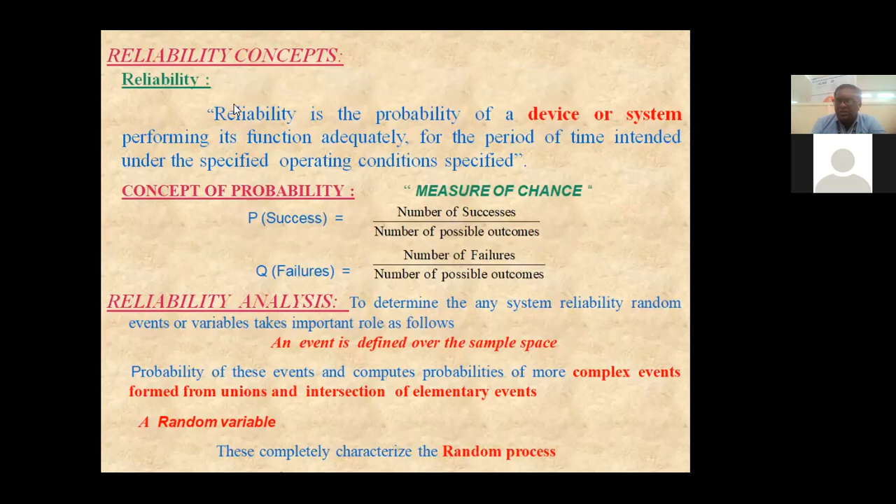So what we know is that majorly reliability is the probability of a device or a system performing its function adequately under stated operating conditions in a specified period.

So if you see that device which I am considering together as an electric vehicle, it's a device which contains so many systems like inverter system, transmission system, and then charging system, battery, like that. Many systems are there. So whether they are functioning adequately or not, when they are functioning adequately, what are the challenges and issues which occur during the operating condition, how it is to be overcome.

So it can be expressed in a qualitative and quantitative environment. So the major single word statement is measure of a chance.

How we are going to make my electric vehicle a success, how we are going to make my electric vehicle a failure, based on the number of successes over number of possible outcomes, number of failures over number of possible outcomes. How to analyze this?

Since my electric vehicle is random in nature, it has got many processes and many procedures. This is a complex system which has to be performed sometimes as unions and sometimes as intersections, as an elementary process or an elementary event, which has been characterized as a random process, as I told you earlier.

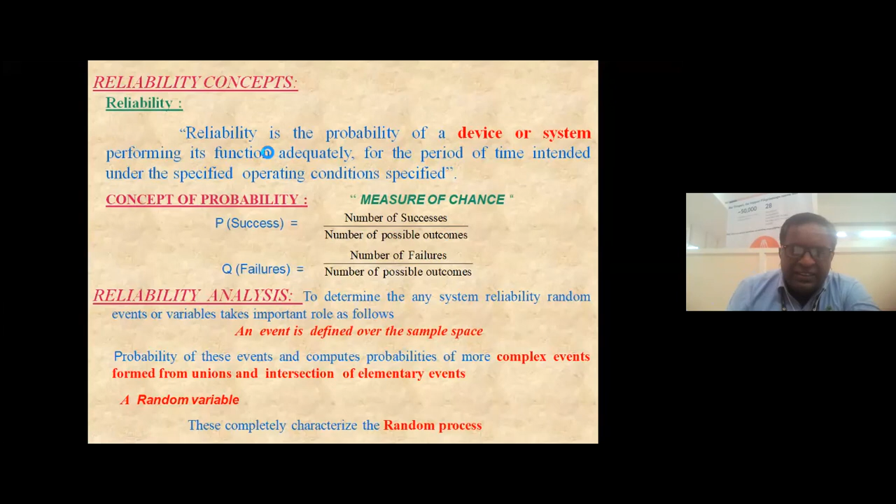So why do we need to go for reliability? To increase the automation process, to assess highly complex systems, and to estimate the high cost of failures and repairs of the electric vehicles or hybrid electric vehicles.

And what are their profitable conditions, and what are their operating abilities that we can able to see, what is the demand for the quality of the product, how we can increase the quality of the product, and what are the additional features that we can add into the next generation of electric vehicles.

And at the same time, how to reduce overall maintenance cost, and how to increase the travel distances so that the overall cost of the society or overall cost of the transportation system may reduce, and to make optimization of resources where it is needed and possible.

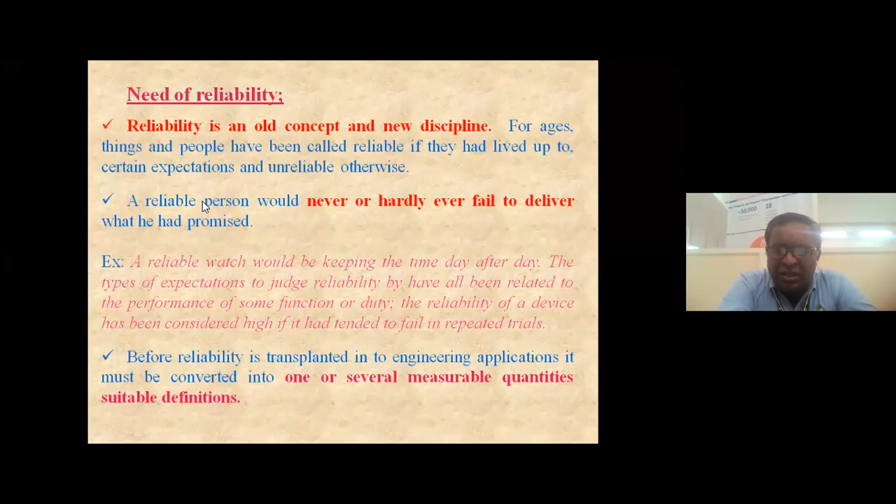So when we consider all these things, we need to identify the intended failures, and repeated trials have to be considered. This has to be in measurable quantities in engineering applications.

So when I'm going to assess, what are the things which I can able to assess? One is past assessment, another one is future assessment.

What is the past assessment which we can see, especially in future transportation systems? What are the weaknesses which we have identified, especially with the help of fossil fuels, where we can see that the cost of transportation becomes very large, especially on average in modern days, 10 to 12 rupees per kilometer has been chargeable.

It becomes very difficult and challenging for a common man to afford, and what are the difficulties of that automobile fuel vehicle? Similarly, what are the weaknesses present in the existing transportation system, and chronological trends in the reliability performances can be observed.

Being able to identify and estimate the existing reliability indices can serve as guidance for future assessments. Past predictions can be compared with the actual predictions that occur at present, and these quantities can change during the time of design as well as at the time of operating conditions. What changes need to be noticed?

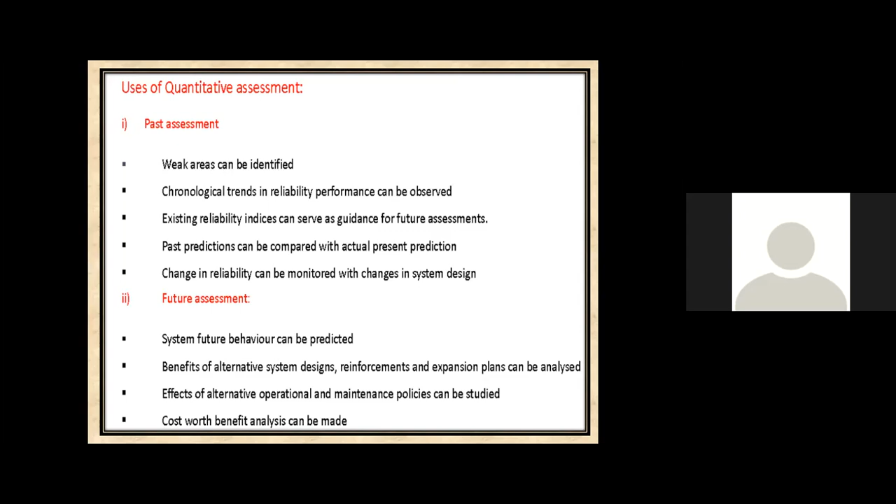This data may make the past assessment useful for future benefit. The future benefit you can see is system future behavior, how it can be predicted, and what will be the future transportation, what are the benefits, and what are the alternative designs and reinforcements, expansion plans, which can be easily analyzed in a complex system in a qualitative and quantitative manner, so that it becomes more effective.

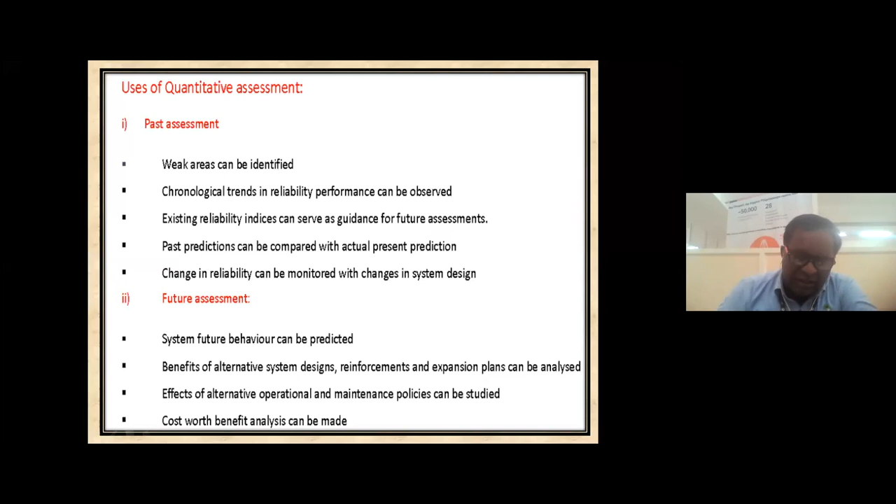This also makes it most cost beneficial and feasible for society. So here, one more thing we have to see is that planning of reliability has to be done at two levels: short-term planning and long-term planning.

When considering long-term planning, incorporating redundancies and various methods which influence the improvement of reliability, how do I need to assess for long-term system planning?

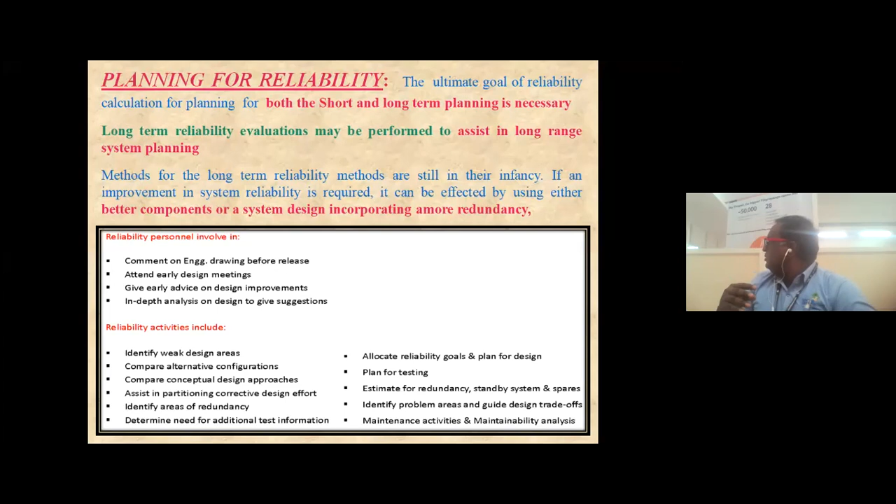Just a second. Sorry for the inconvenience, it's a college. No, students will come and go.

So what are the parameters which need to be considered and involved? Personally commenting on engineering manufacturing drawbacks in designs, being able to attend to new designs, early meetings, early advice, design improvements, probably in-depth analysis with proper suggestions, probably taking the feedback of previous consumers, and various difficulties, challenges, and issues which make the reliability personnel involved for better design and better planning.

So in that perspective, what are the parameters we are going to identify? One: weaknesses in designs, operating conditions, configurations, approaches, and corrective actions. What redundancies do we have to implement? What various testing practices and maintenance activities? All of this makes for better planning of reliability, and at the same time we can make it commercially cheaper.

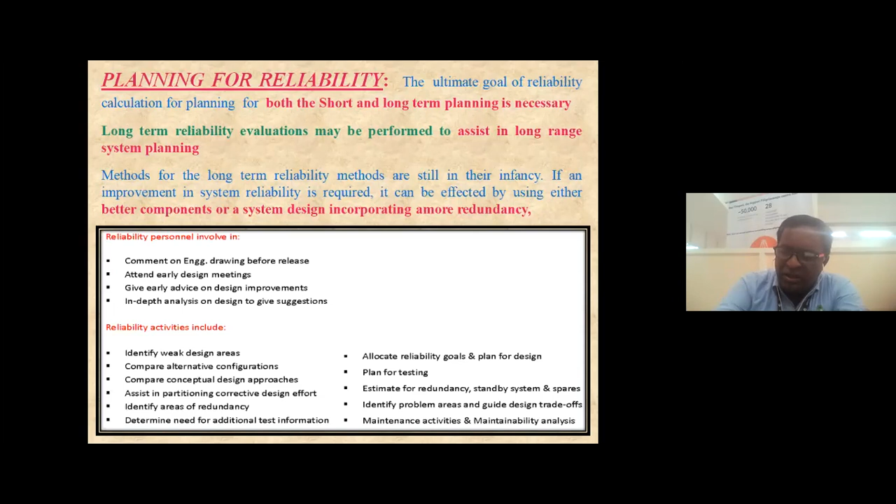So short-term planning may be considered for day-to-day operations, and what disturbances occur which need to be evaluated. Some of them are outages and interruptions.

It may consist of repairable components or repairable states during the effective functioning of the component and system. An outage describes the state of a component - outages and interruptions are two important concepts.

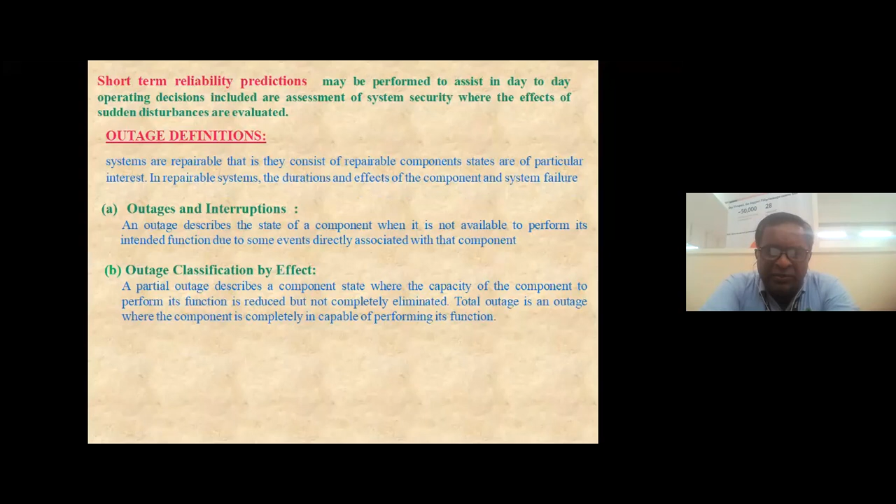Outage means it is a failure; interruption means it becomes a break. Again, it will be rectified and made functioning, intended to function. So where the duration of the failure is less, that's interruption, whereas in outage, the component will be completely failed.

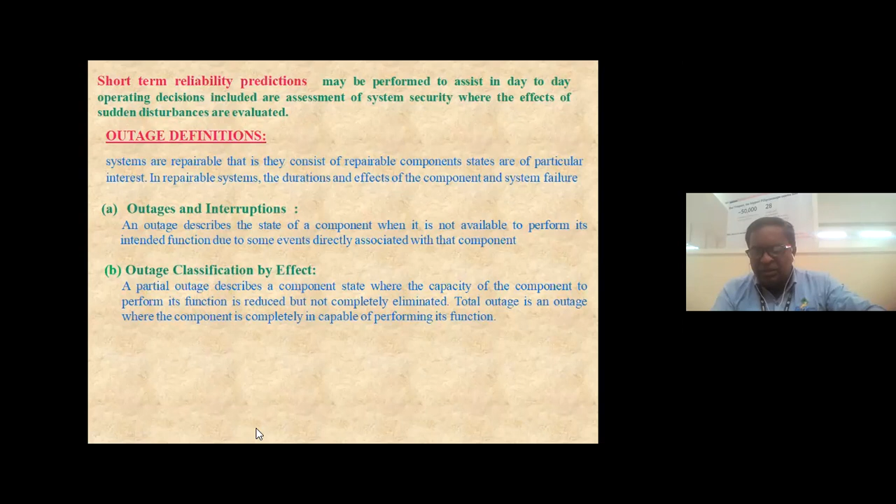Outage may be classified by its effect due to wear-out condition, or it may be due to heating effect or thermal effect, or the state of the component, or it may be failure in any of the parameters.

Outage classification by cause - what causes can affect this? Due to human error, or due to operational error, or equipment functioning.

So some of the forced outages during operating conditions are due to flashover, or due to component failure or component outage, which may be replaced or may not be replaced in some applications.

Interruption classification by cause - this is named as scheduled interruption. As we know, fossil fuel vehicles have to be regularly maintained, that is cleaning of air filters, fuel filters, and maintaining the air levels of wheels, where we need to force and make an interrupt, and we need to schedule it and activate it.

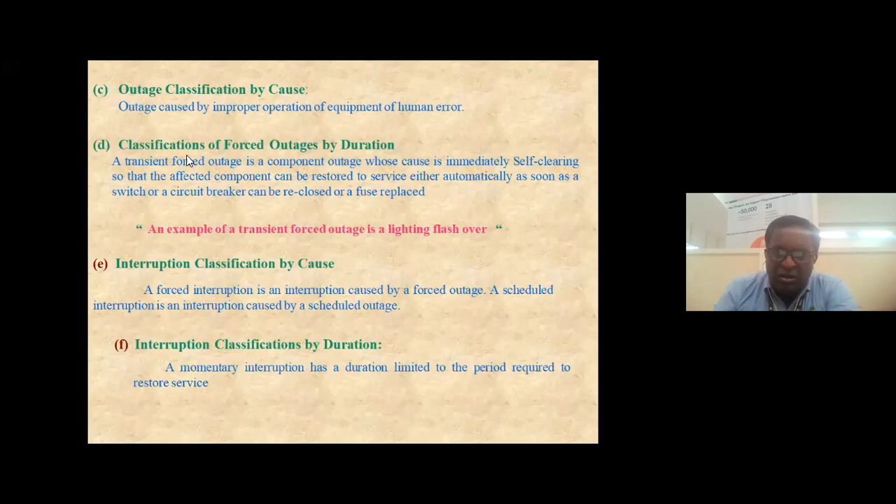So sometimes it may be a momentary interruption, or sometimes a longer interruption. As we know that...

An electric vehicle may be categorized into a bathtub curve, one of the most fundamental aspects in reliability engineering, where lambda T is the failure characteristic, which has been classified into three parts: burn-in time, useful life, and wear-out condition. If you consider any component or system, initially it may function very effectively with fewer failures, but when used over a longer period, due to wear-out conditions, failures increase.

So you can see here, the dotted line which I have shown, over a period of time, increases the failures. But some electric vehicles or electronic gadgets or components possess some initial failures; later, slowly it reduces the failures over a period of time. You can see that represented as a smaller dotted line.

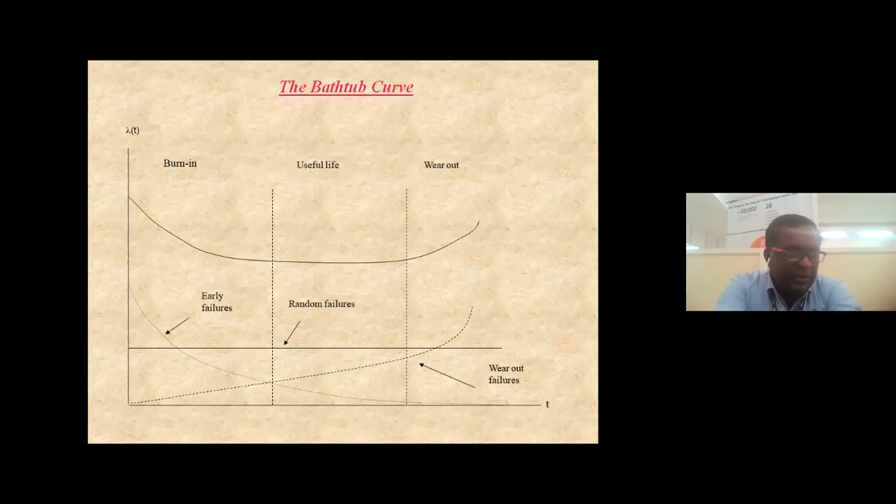Once component base became functioning correctly and regularly, you can see that the failures are constant. During the burn-in period, failures are decreasing. During the wear out period, failures are increasing. During the useful life period, failures are constant.

Since it is random in nature, there will be two types of variables existing in reliability engineering: continuous random variable and discrete random variable. In continuous random variable, it will be called probability mass function, probability density function, cumulative distribution function, which will be considered in two distributions: one is binomial distribution, the other is Poisson distribution.

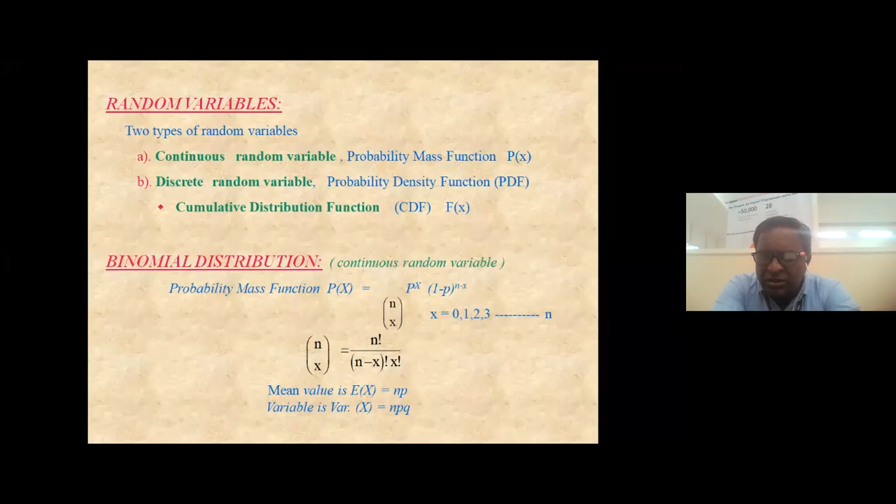The probability mass function is represented as P of x, whose mean value is NP, where N is the number of trials, P is the probability of the component, and whose variance is NPQ, where Q is the success and P is the failure of the component.

Similarly, for a Poisson distribution, the reliability function is defined as the probability of a component or system functioning over an intended period of time under stated operating conditions adequately, which can be expressed as probability of t greater than t. Any new component or new vehicle has reliability initially at 1, whose reliability at t equals infinite condition is 0, which appears as a failure, probability of failure.

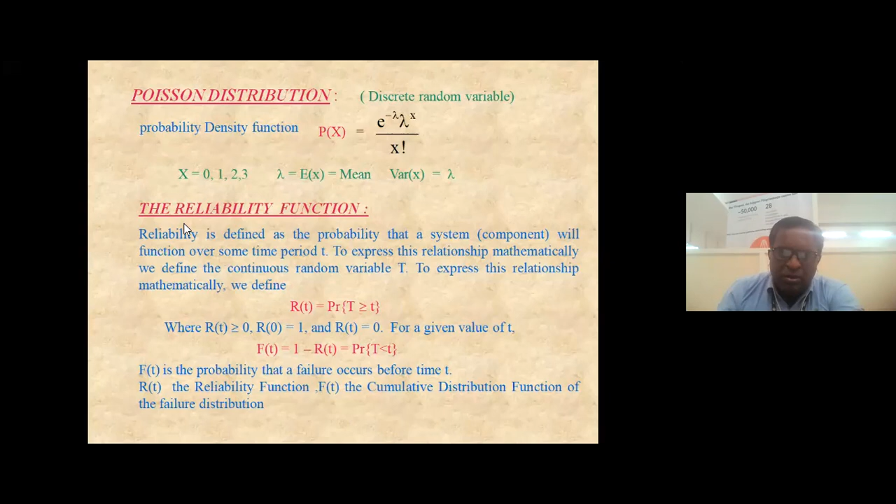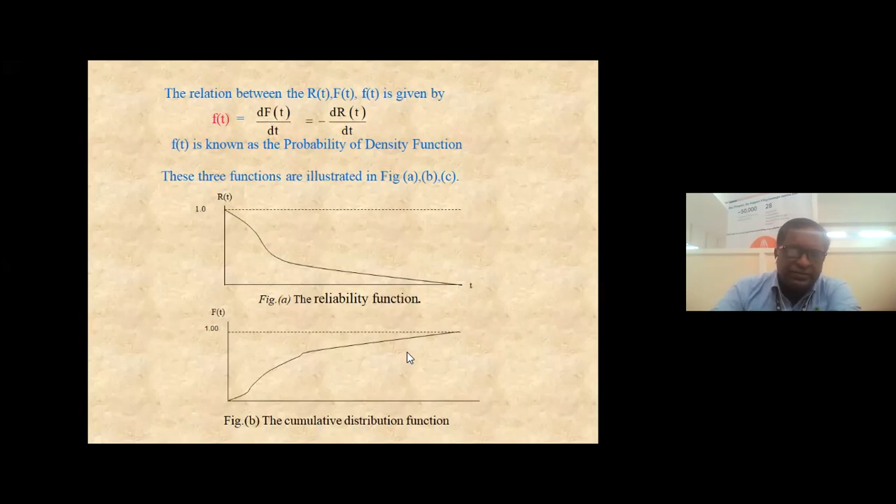So here is the relation between cumulative probability, the probability density function, and the reliability function. The reliability function decreases over a period of time, whereas the cumulative distribution function increases. The probability density or distribution function has an area of 1.

We are going to define 3 parameters: mean time to failure, mean time between failure, T median, and T mode. T mode is the maximum probability density of the function. T median is the 50% time period of the probability density function. Mean time to failure and mean time to repair are other variables.

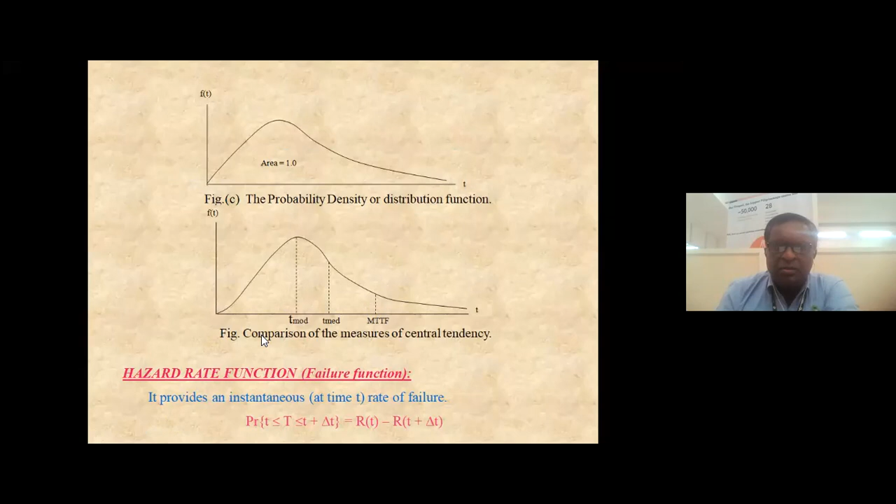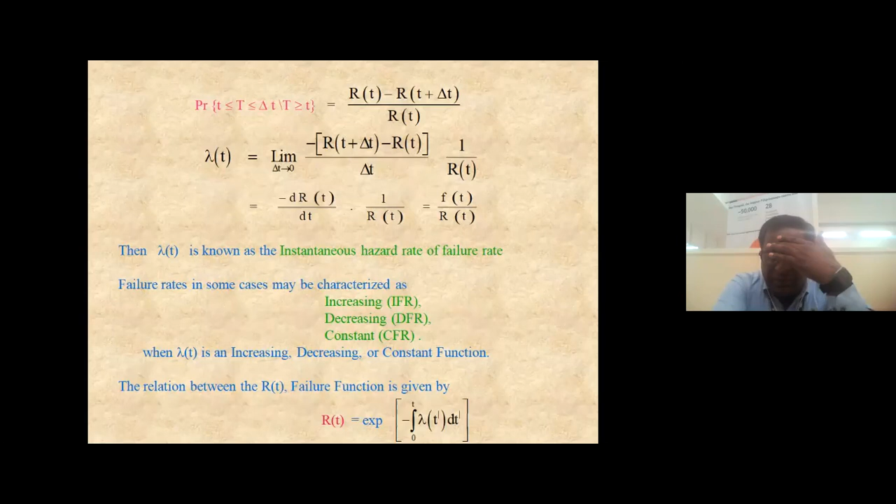One more important parameter to consider is failure rate or hazard rate, which also depends upon the reliability of the system. Lambda of t is the failure rate or instantaneous hazard rate, defined as the ratio between the probability density function and the reliability function. It may increase, decrease, or remain constant, depending on the useful period of the component or system.

Once the failures are constant, that will be characterized as exponential distribution. When increasing and decreasing, they will be characterized as different distributions. So it becomes a measure.

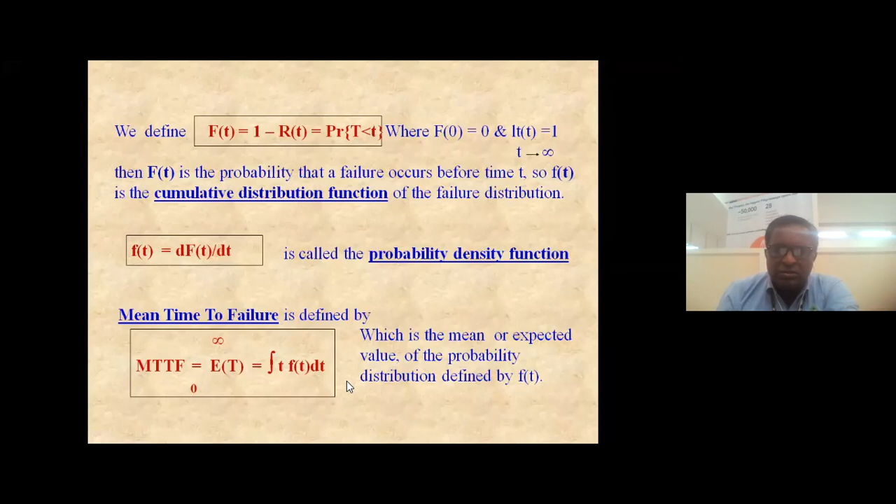How to calculate probability, MTTF, how to calculate probability density function. As I've already told you, types of failure distributions include constant failure distribution, named exponential distribution, and time dependent failure distributions. Time dependent distributions are Weibull, log normal, and normal distributions.

You can see the exponential distribution mathematical representation, where failures are considered constant during the useful period. This computation, this assessment, makes the accuracy more correct.

Here I have considered some of the failure rates of the electric vehicles: 0.25 lambda value, lambda equals 1, lambda equals 5. With the failure rate lambda at 0.25 failures per year, we can see that the reliability of the component becomes very large. If the failures become 1...

That depends upon the operating conditions and operating scenarios of the electric vehicle. These lambda values will be considered based on the data which we are going to collect. Lambda value equals 0.25 for the period I have considered here, 6 hours. So their lambda value is 0.25, which may vary less for a new vehicle.

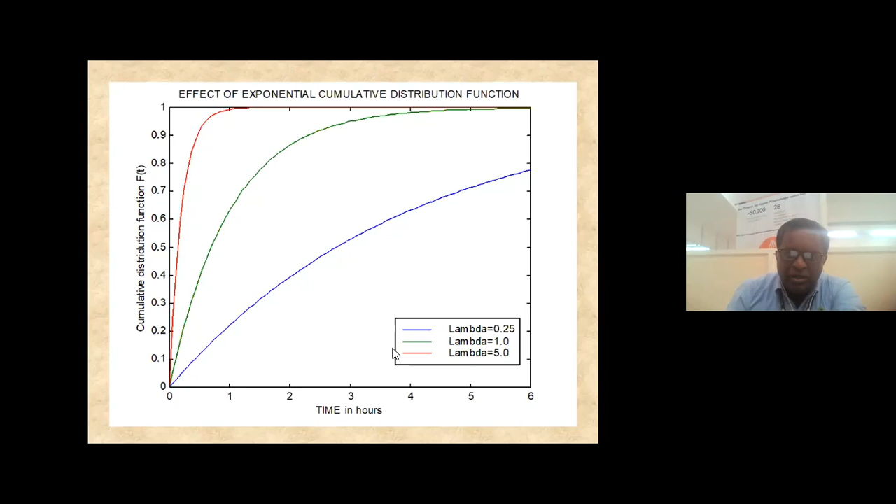For the cumulative distribution function, especially with lambda value of 0.25, lambda value of 1, and lambda value of 5, when there is an operating scenario where the number of failures increases, you can see that it becomes very quick to get operating failures. Whereas if it is 1, you can see that the operating levels are getting increased.

So in this constant failure distribution, if we have a number of failures that are less or failure rates that are less, we can enhance the reliability of the component.

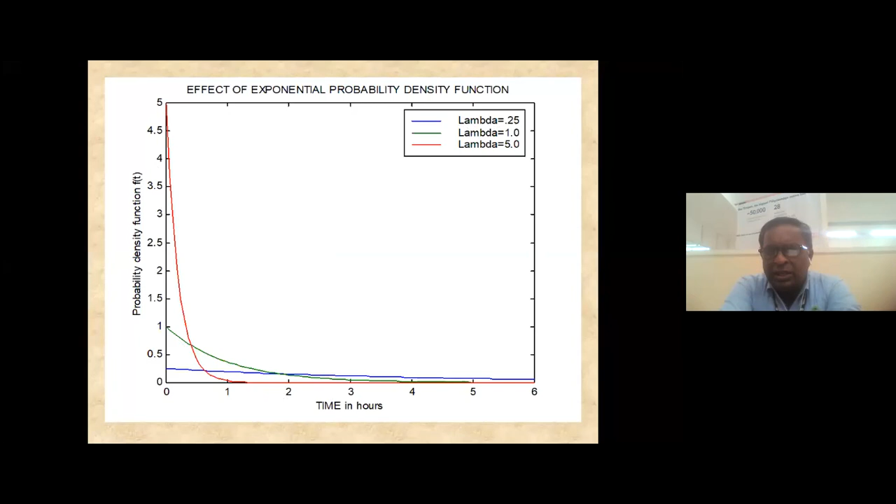Next, I'm going for another one, Weibull distribution, which is one of the most important probability distributions. It is composed of both increasing and decreasing failure rates, and it can be characterized into two different formats. One is lambda of t equal to a times t power b, where if a and b are greater than 0, it becomes increasing failure rate. If a is greater than 0 and b is less than 0, it becomes decreasing failure rate. So this is what you have to see.

Therefore, another form of the Weibull distribution is lambda of t equals beta by theta, which may be called theta or alpha depending on requirements. H of t is nothing but failure rate or hazard rate, where beta is named the shape parameter and theta or alpha is called the scale parameter. Based on previous definitions and derivations, f of t, capital F of t, and R of t can be determined. Beta and alpha are the important parameters to identify the nature of the component or system when assessing qualitative and quantitative aspects for any typical application.

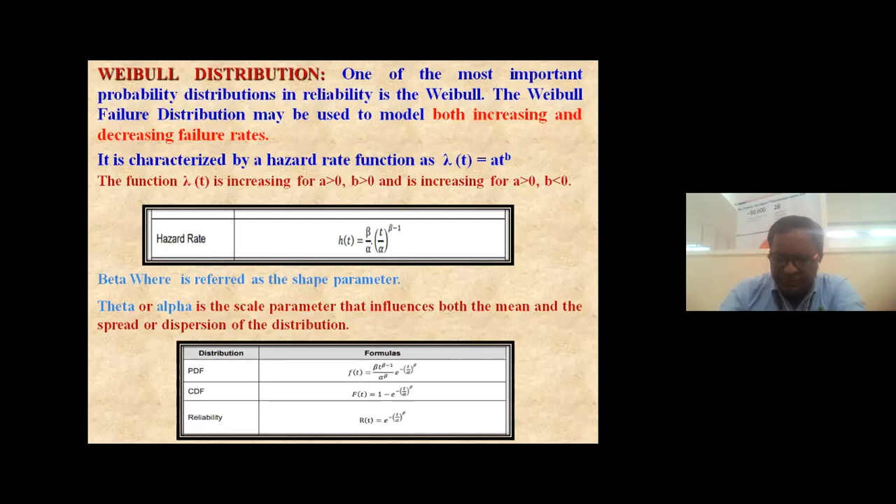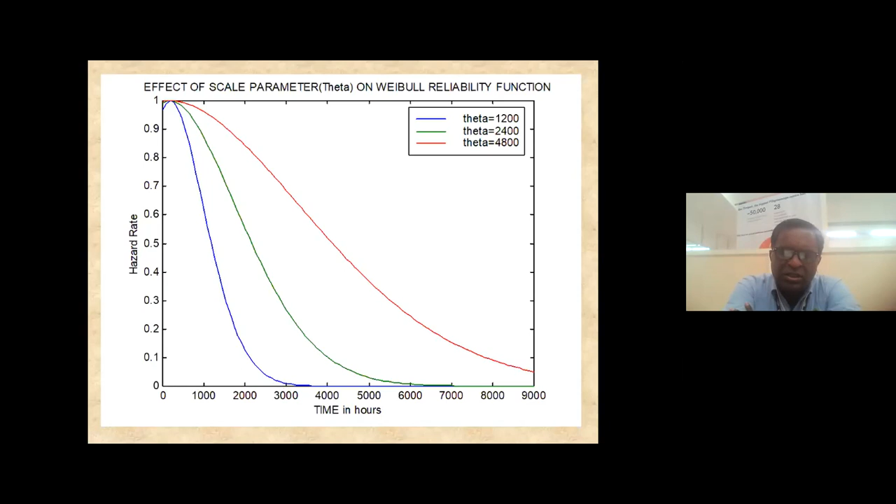So we have to see that the scale parameter theta should be as large as possible, so that the number of operating hours gets increased.

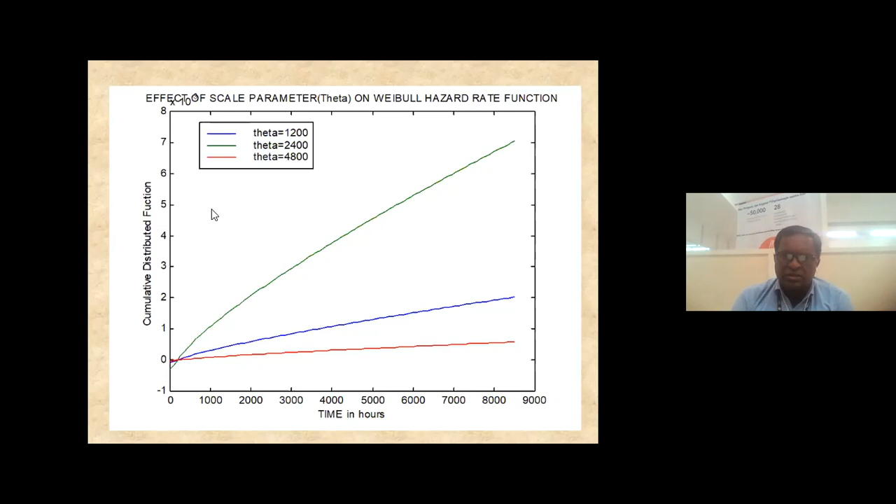So for the Weibull distribution, similarly you see the probability density function, where theta changes from 1200 to 4800. As theta changes, the probability density shows that the operating time area is increased. Here I've taken theta as the scale parameter, a variable, with shape parameter as a constant.

Next, looking at the same probability density function, you can see that the area required for lower theta is getting more, the area required for higher theta and medium theta becomes lesser. This is the most important point: the area covered here becomes large, and the performance is also large, which makes for better functioning.

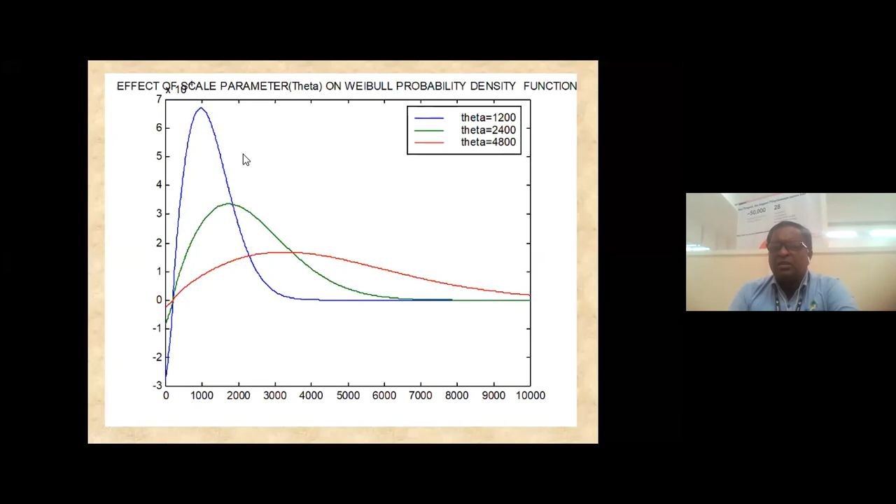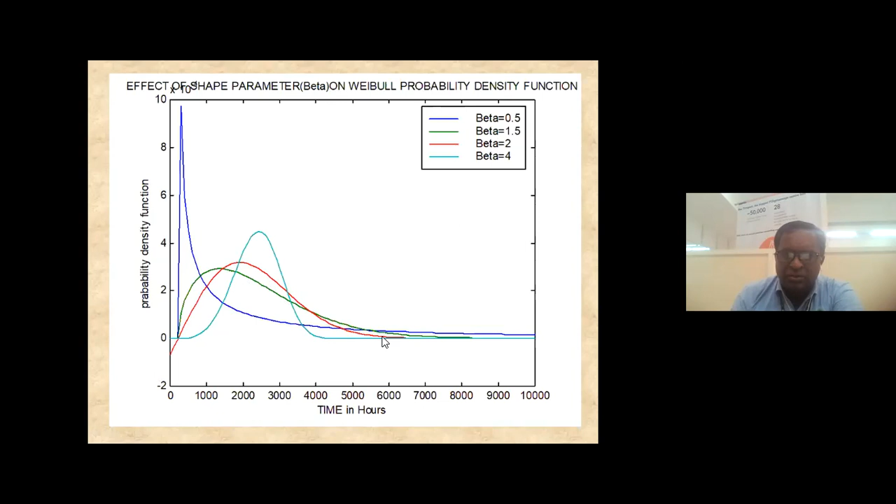Similarly for the cumulative distribution function, you can see that especially the operating hours is 2500. Similarly for the probability density function, you see that if you have a lesser beta value, the operating periods are large. Whereas here with a higher beta, though its area becomes large, failures are more here—so component replacement, adjustments, or modifications may come into the picture. Similarly here, the cumulative distribution function with beta.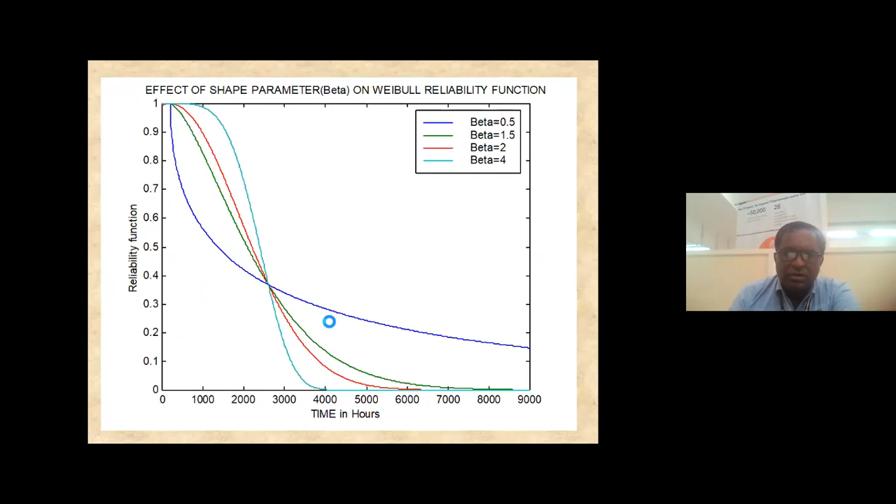Now you can see that shape parameter of the components.

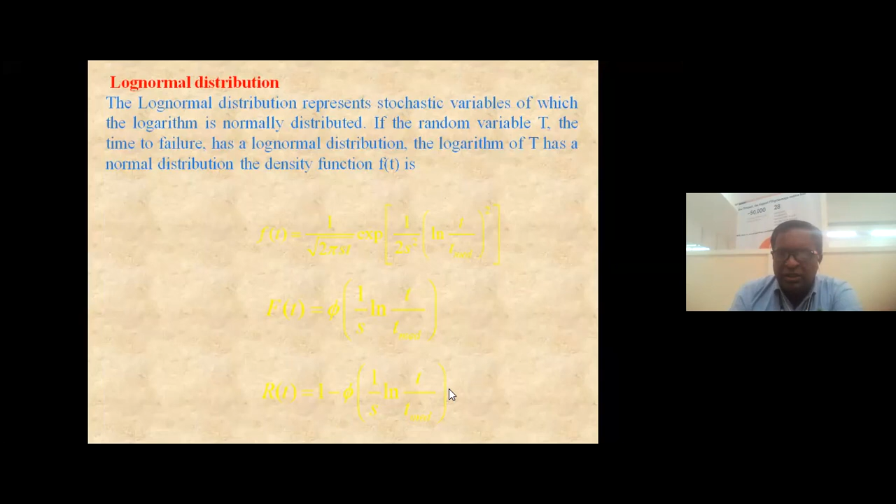Another one, log normal distribution, which is one more important distribution for stochastic process of any component or any system. You can see that it can be mathematically expressed. Here T median is the median time, especially exactly 50% of the operating time, and T is the total operating time. So where I'm changing the parameters A1, A2, A3, A4, I'm not showing here cumulative probability density or hazard rate function. Straight away I'm going for reliability function, where I'm changing the A1, A2, A3, A4 values.

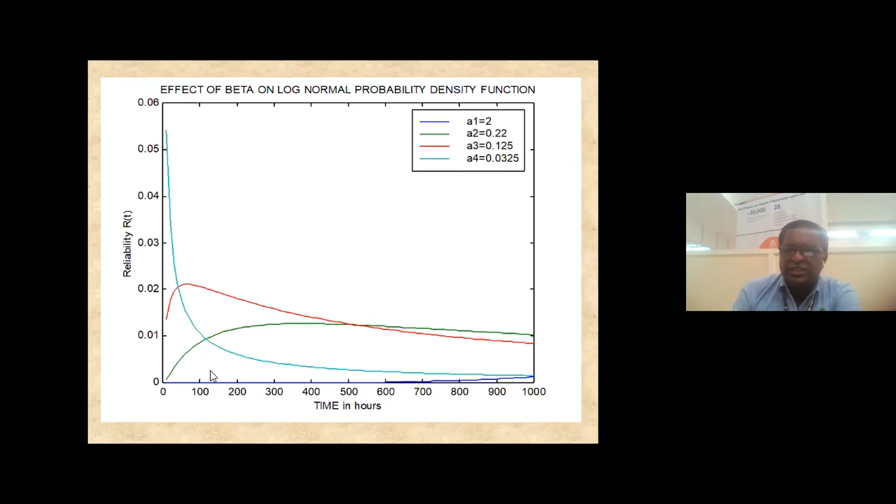When we go to the system, in electric vehicle, many components exist. It may be connected in series manner, it may be connected in parallel manner, or it may be connected in a meshed system. If the components are connected in series, whose reliability can be expressed as a mathematical function. Here in series system, all components function, then system is going to function. If any one component failed, system is not going to function.

Similarly, in parallel system, components are connected in parallel. Any one component failed, other components may cause the system to function. So therefore, there are mathematical reliability assessments which you can see.

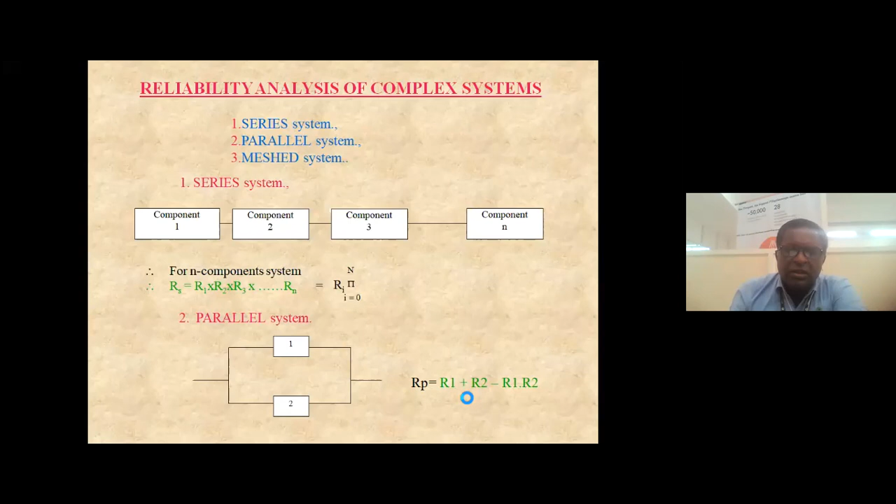Especially in parallel system, they'll not consider system success, they'll consider only system failure. If both components failed, system gets failed, so that is why here they'll consider it as QS. So parallel system is called failure system, series system is called success system. So parallel system is called reliable system, series system is unreliability system.

But when we consider my electric vehicle, it may have a combination of components in series or parallel, or it may be connected in complex. The complex system has to be evaluated either in terms of Bayes theorem, path-based approach, or any cut set approach, that is tie set and cut set methods. These are all the techniques which are used in reliability engineering for assessing the complex system.

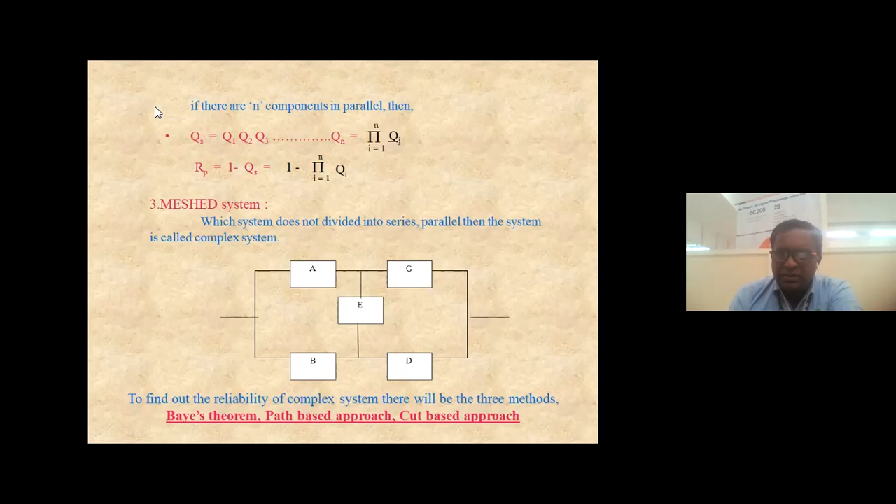So here, this is the critical component. So here I'm defining: if component E success, what happened? If component E failed, what happened? So if E is success, this will be shorted, and this is connected in parallel, this is connected in parallel. If E failed, it will be open, this is connected in series, this is connected in series. Therefore, the complex system will be replaced into a series system or parallel system, depending upon the condition. That is called Bayes theorem.

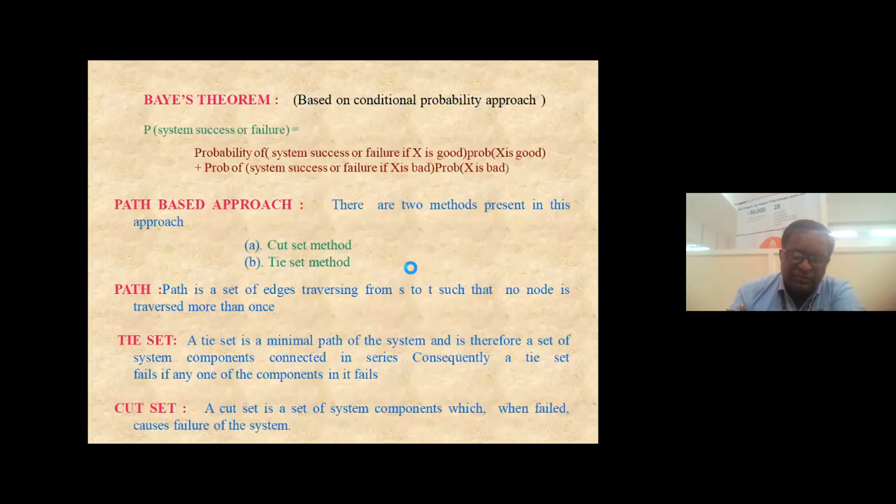So the methods used to assess these complex systems are tie set method and cut set method. How to model reliability system for a typical real-time application? It has to be characterized or summarized into a list of components and how it is to be assembled, and what are their component failure rates. At the same time, we should define the criteria for the system failure, and what are the assumptions which we are going to make for constructing a model, and what are the new system models or system specifications which need to be considered.

Need to perform failure effects analysis, compute the system reliabilities, and need to evaluate the results. As I already told, it becomes a qualitative and quantitative assessment. We need to define the system, list of components, how it has to be assembled, what are its component failure rates, criteria for system failures, and need to construct a model. The model develops the system model as a function, as it is operating, as it becomes effectively performed, or else what are their failure effects, and what are their reliability indices which have to be computed, and need to analyze the results with the help of evaluation.

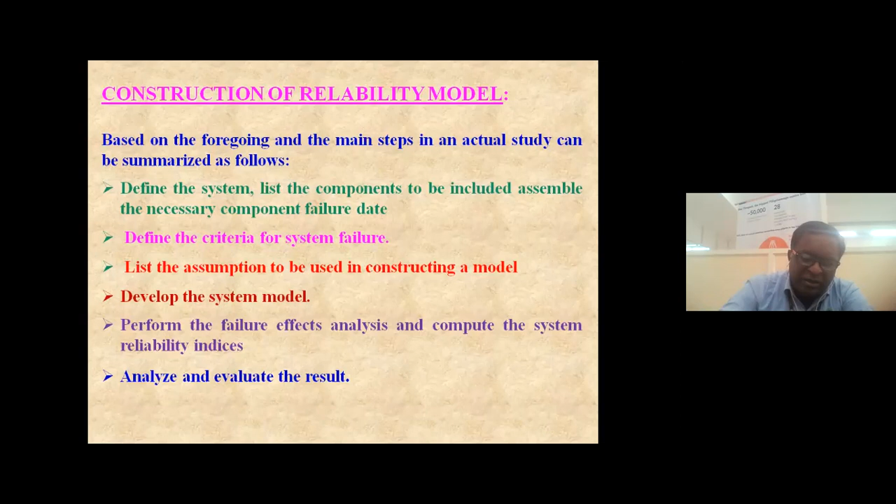So here you see that normally a system is characterized into up and down states. Similarly, here I am considering an electric vehicle. Either it may be up or down state. If it is up, it is available. If it is not available, down, then it is called not in service, not available. So that means it may go for repair.

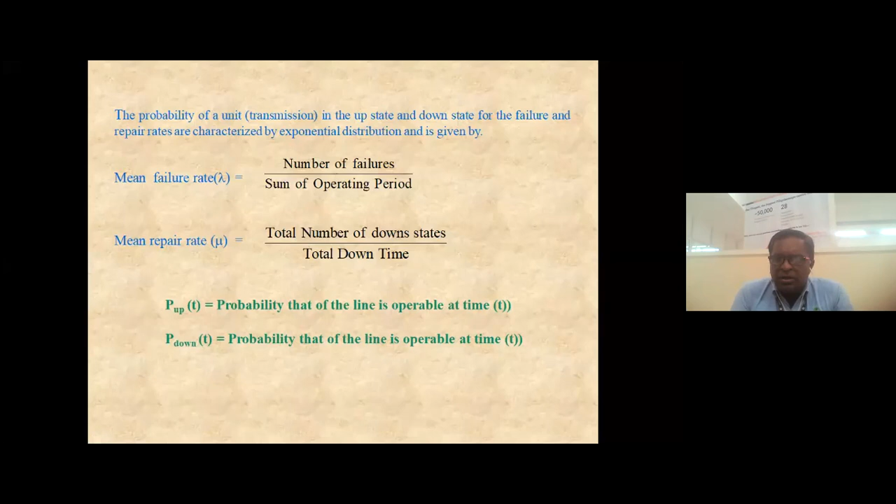It has to be calculated: mean failure rate is number of failures to the total sum of operating periods, mean repair rate is total number of down states to the total downtime. From this we can calculate probability of up and probability of down, i.e. operable and non-operable times, probability of non-operable times.

Where R is the repair time, M is the operable time. For a constant failure rate, I am considering exponential failure rate, which is constant. I define mean time to failure as 1 by lambda, mean time to repair as 1 by mu. Time between failures, T, is equal to M plus R, that is MTTF plus MTTR. From that we can calculate frequency of failures as lambda mu by lambda plus mu.

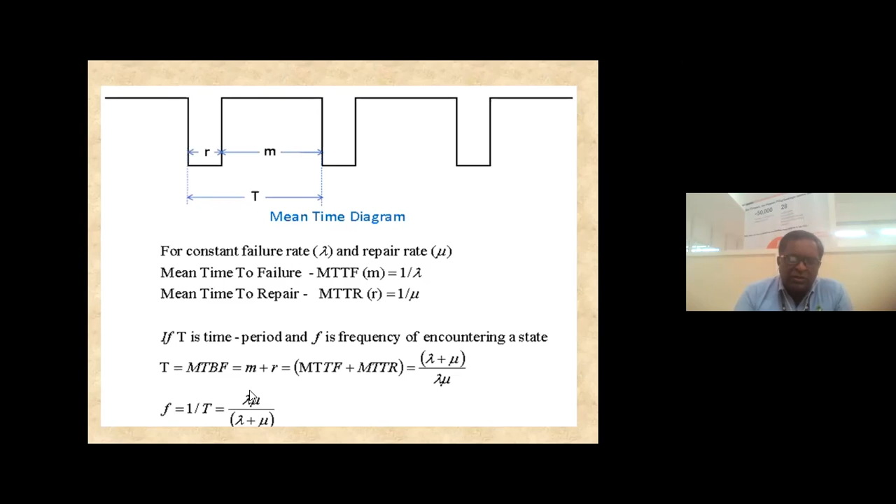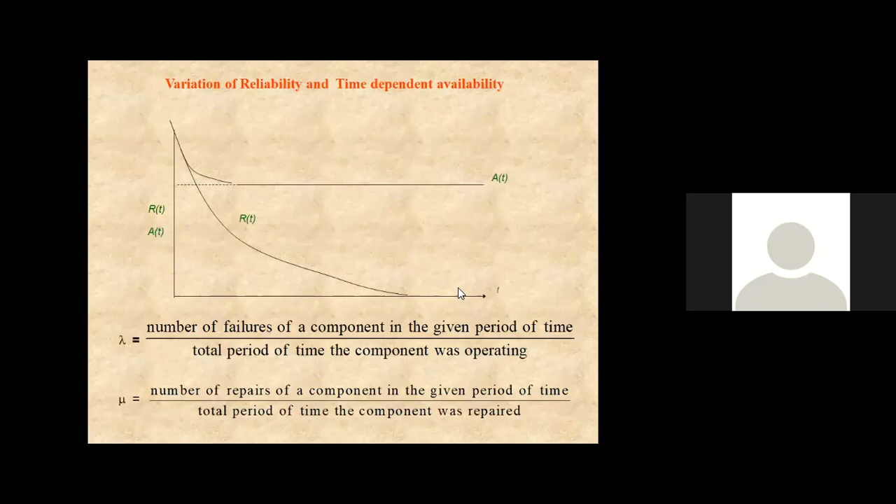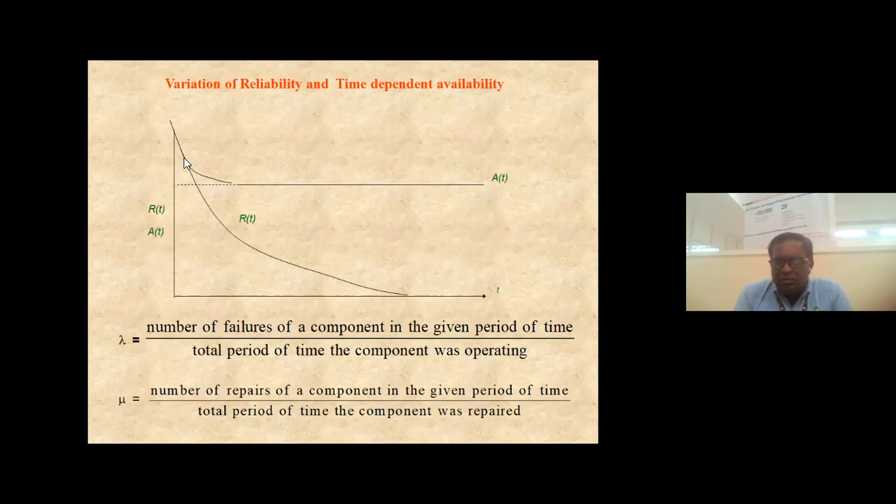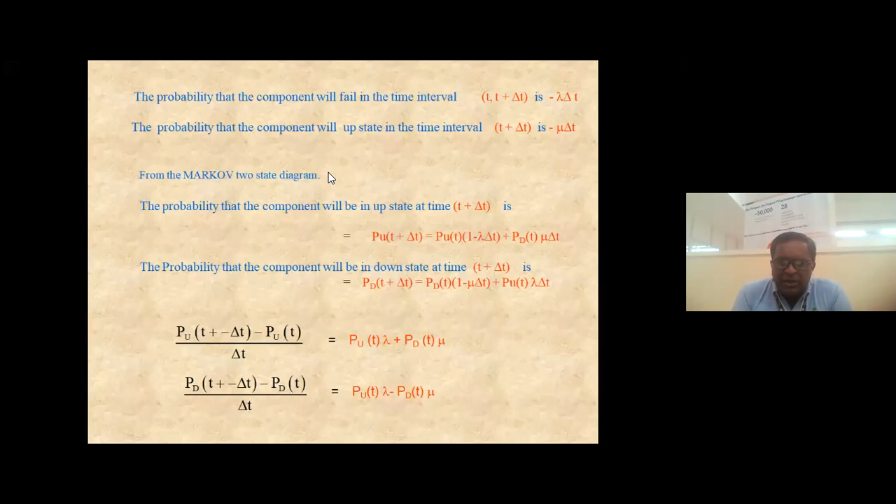So it has been characterized as a Markov process for a specified time interval T, T plus delta T, which has been applied into a state diagram and state process, mathematically represented as P of up at 0 equals 1, P of down equals 0 during the initial condition. Whereas during final conditions, P of up at infinity equals 0, P of down equals 1. So by and large, up plus down equals 1.

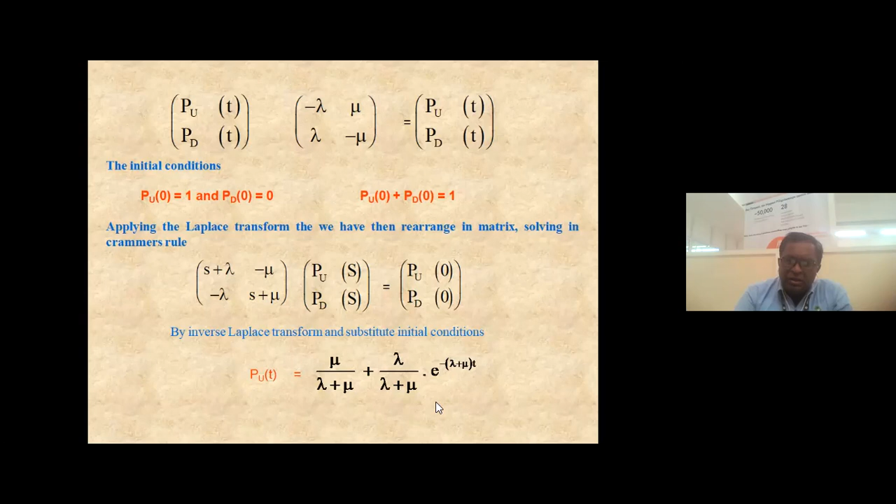After making this mathematical analysis, we characterize P of up, that is probability of uptime, and probability of downtime. Since my component time period is very large, as t tends to infinity, other parts are neglected. P of up is equal to mu by lambda plus mu. P of down is equal to lambda by lambda plus mu. Where up is called availability, down is called failure. So therefore, R plus Q equals 1 from the given system.

So these are all the basics of reliability engineering. How I am going to apply this, we will see in the next level.

So, future electric transportation systems: two are there majorly. One is electric vehicle, another one is hybrid electric vehicle. Both are being used in the future to have a sustainable transportation system. Sometimes hybrid electric vehicle may dominate electric vehicle for better performance. We will see that.

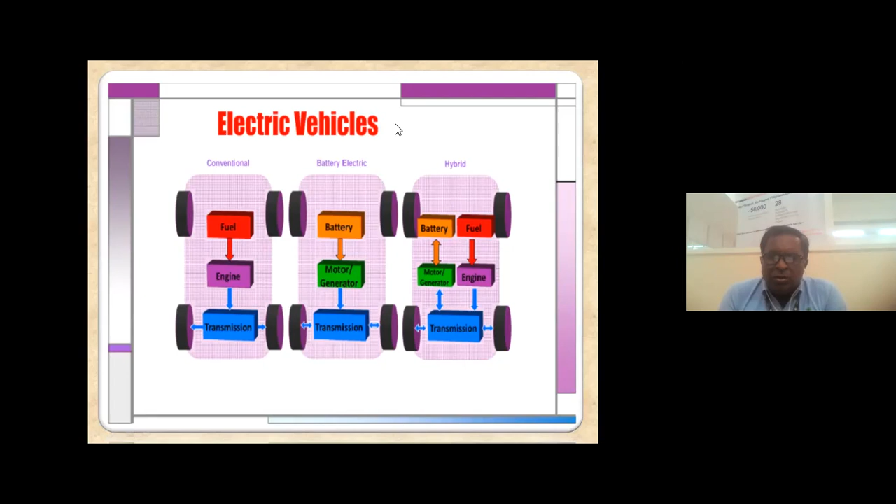Whereas hybrid vehicles have both battery, fuel, motor generator, engine, and transmission system. What are the modes? We will see in the upcoming slides.

So you can see how the electric vehicle has been represented. It requires a rechargeable battery, connecting cables, and a controller which is fed to an electric motor, which is directly connected to the transmission system.

During the process of forward direction without applying the brake, it becomes movement, a tractive force which tries to move the automobile from one position to another place.

When it becomes a braking condition, it becomes the regenerative braking system, which works as a generator that tries to charge the battery during the regenerative braking condition, during the regenerative braking cycles. So that's the basic step for a purely electric vehicle.

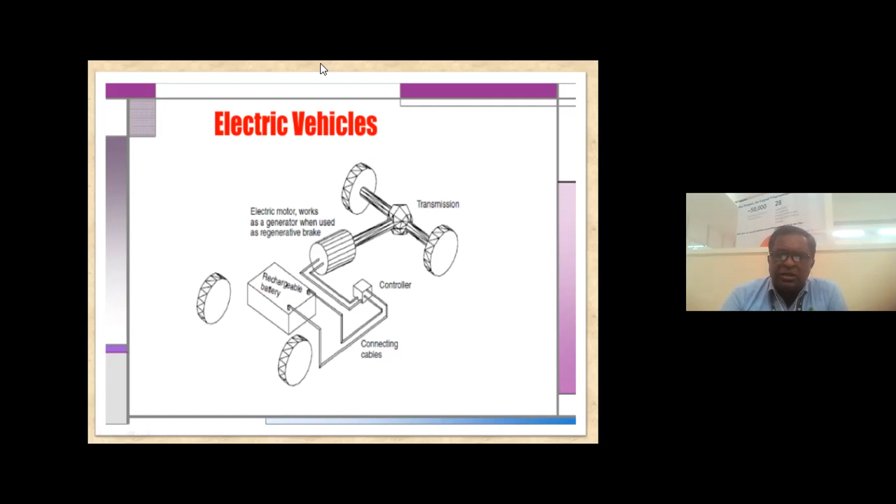So once it is connected together, it becomes converted into a hybrid electric vehicle. In the model of the hybrid electric vehicle, we can see that it contains a battery, which may be nickel metal hydride, lithium ion, or lead acid, depending on the size and capacity of availability.

And it requires a generator, an engine, and a motor. Once you see the power control unit, from the external battery, through the power control circuit, power is directly fed to the motor, which is connected to the transmission system through gears, causing movement of the automobile.

When running with the engine, which contains a power split device, it gets excited to run the generator with the help of the power control circuit, which supplies power to the electric motor to drive the automobile.

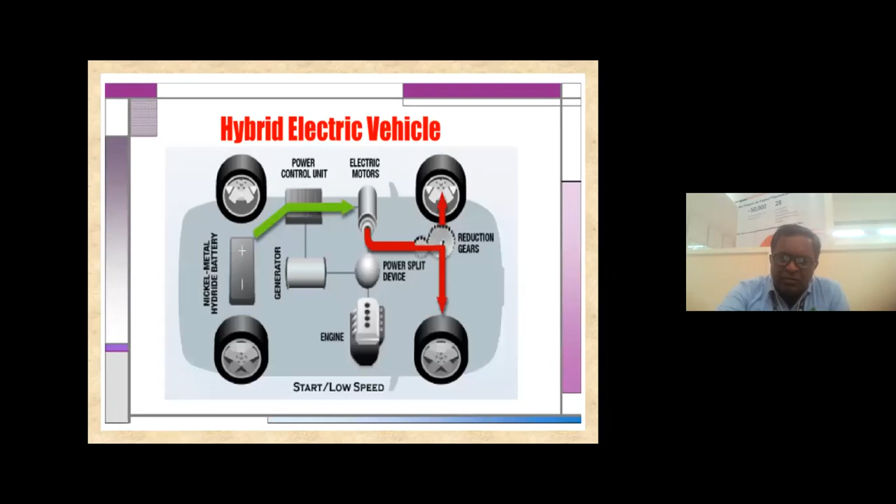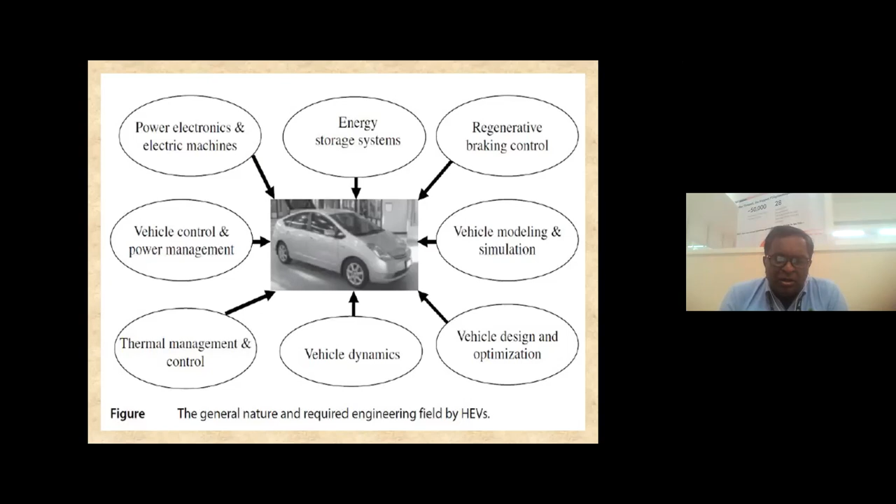Series hybrid electric vehicle architecture - we'll see that as well. How to control a hybrid electric vehicle? It requires power electronic components and electric machines, energy storage device, and also a regenerative braking system, vehicle modeling and simulation, vehicle design and optimization, vehicle dynamics, thermal management system and control, vehicle control and power management.

So here you can see the series electric vehicle configuration: fuel tank, engine, generator, rectifier, motor, motor controller, which is connected to the traction motor and transmission system, to get tractive effort to move the vehicle forward. The same fuel engine through generator and rectifier, with the help of DC to DC converter, tries to charge the battery.

Battery charging is also possible. When there is no fuel, with the help of an external source, you need to connect a battery charger. The battery gets charged and it is converted using a boost converter from lower voltage to higher voltage, which feeds the motor controller and traction motor, causing movement of the system. So sometimes with the help of engine, generator and rectifier the battery may charge, or sometimes due to the regenerative braking condition the battery may get charged.

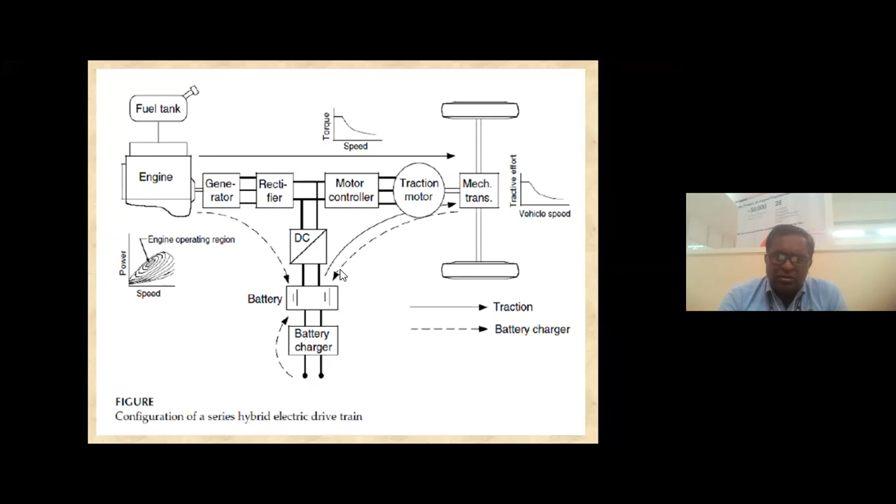So you see that in series hybrid vehicle: battery, inverter, motor, driven wheels. When it is driven with electric power, that is most important. Normally the petrol engine runs as a generator. The generator either charges the battery or runs the electric motor to drive the transmission system. It becomes low fuel cost and best suited for city transportation.

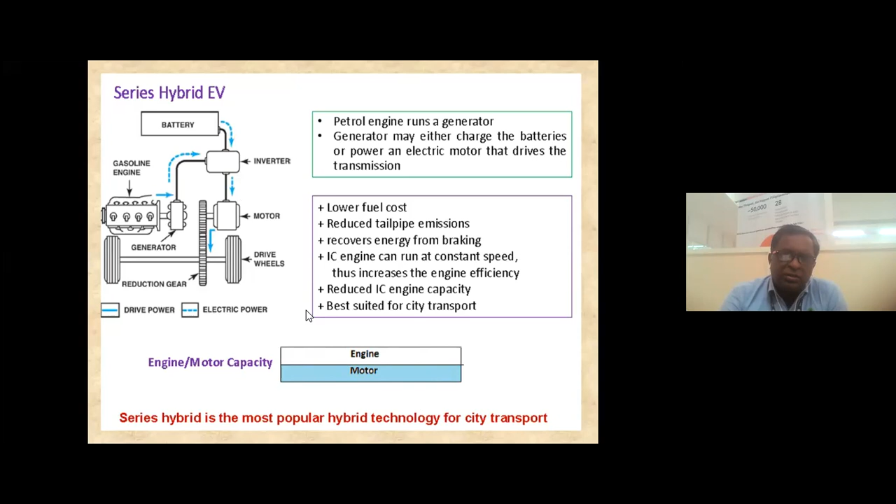If you see, 50% is engine, 50% is motor. So it contains 7 operating modes: pure electric mode, pure engine mode, hybrid mode, engine traction and battery charging mode, regenerative mode battery charging, and hybrid battery charging mode.

When it runs purely on electric mode, it will run with the help of electric power supply. The engine will be turned off, and the battery will supply the total energy to run.

When running purely in engine mode, it will run with a generator, and it will charge the battery, or it will drive the power and make the transmission system driven - that is engine driven. In hybrid mode, it may be a combination of both the generator and battery.

The other mode is engine traction and battery charging mode - the engine generator supplies power to charge the battery and to propel the vehicle. In regenerative braking, the engine generator is turned off and the traction motor operates as a generator; the power generated is used to charge the battery. This is for a very short period.

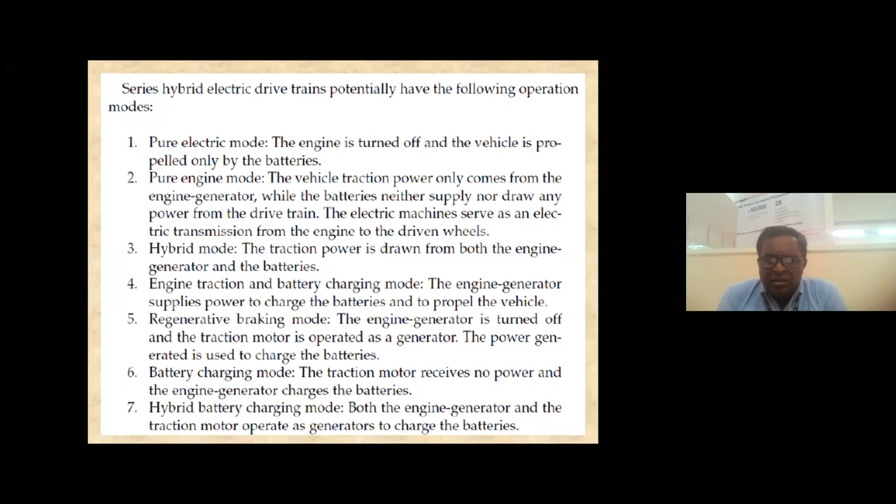Battery charging modes, which you can see.

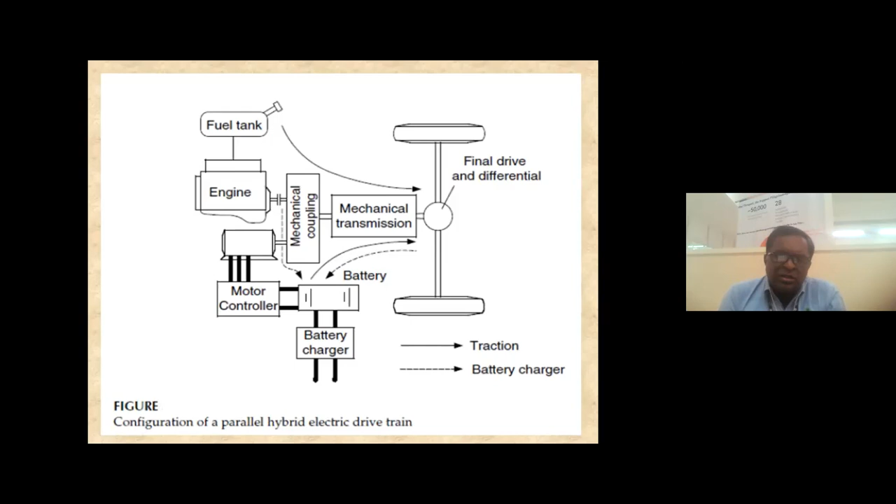Similarly, parallel hybrid electric driven system: fuel tank, engine, mechanical coupling, mechanical transmission system, the same motor controller, motor, and battery charging system. Here an external battery charger is used. When the battery needs to be charged, it is only during the regenerative braking condition that the battery gets charged - the motor electric machine converts to an electric generator, and with the help of the motor controller the battery gets charged. At that time the battery charger will not function.

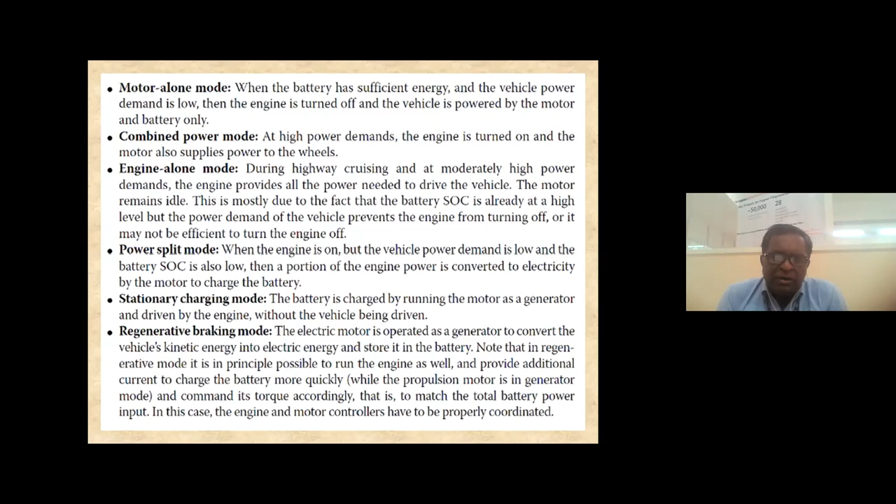At that condition, we can identify power split mode, stationary charging mode, and regenerating mode. In regenerative mode, the electric motor is operated as a generator to convert the vehicle's kinetic energy into electric energy, which is stored back to the battery, or with the help of a flywheel, or it may be used for a capacitor. The regenerative mode also makes it possible to run the engine and provide additional current to the battery more quickly, charging it faster and giving more propulsion.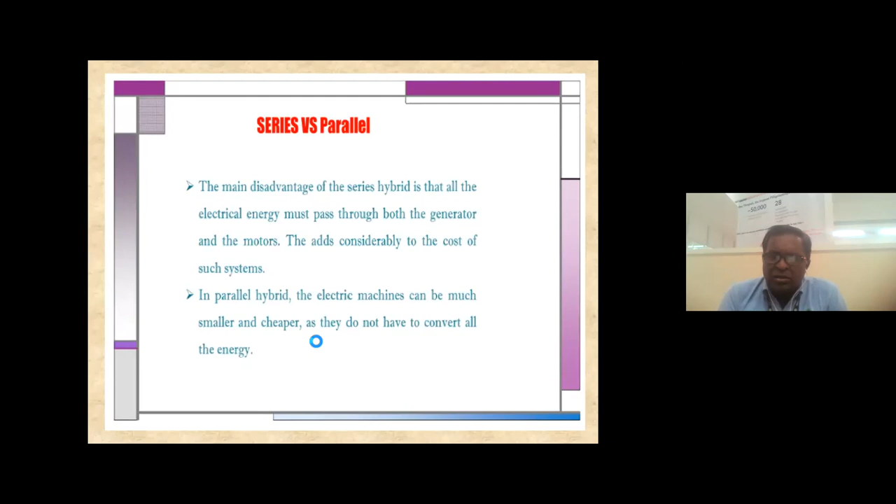In both series and parallel hybrids, the engine also runs to charge the battery. Now let's see series versus parallel. The main disadvantage of the series hybrid system is that all electric energy must pass through both the generator and the motor, which adds considerably to the cost of such a system. In parallel systems, the electric machines can be much smaller and cheaper since they don't need to convert all the energy.

That is the degree of hybridization. Based on the progression of technology, we may be able to provide an optimized degree of hybridization. So when using electric vehicles, you may use a brushless DC motor, or permanent magnet synchronous motor, or induction motor, or permanent magnet switched reluctance motor. For batteries, you see lithium ion battery, nickel metal hydride batteries, lead acid batteries, or ultra capacitors, which are used for electric vehicles.

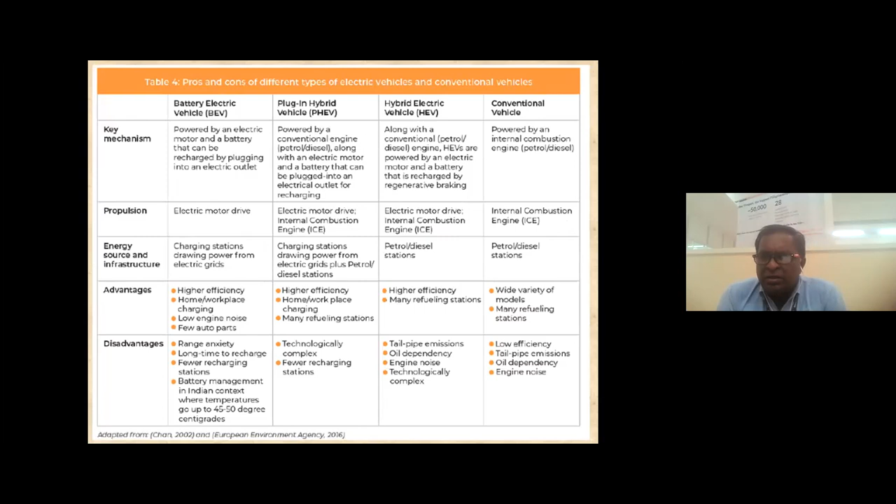Here you require an internal combustion engine. Here also you can see the disadvantages mainly, I am concentrating on that; I'm not considering the advantages. For battery electric vehicles: range limitations, long time required to charge the battery, lesser charging stations, and battery management in Indian context is a challenging role—once the battery gets heated up to 45-50 degrees, it becomes very difficult. For plug-in electric vehicles, the technology becomes complex, and again the disadvantage is lesser charging stations. Whereas hybrid electric vehicles have tailpipe emissions and oil dependency, and conventional vehicles have lower efficiency and engine noise.

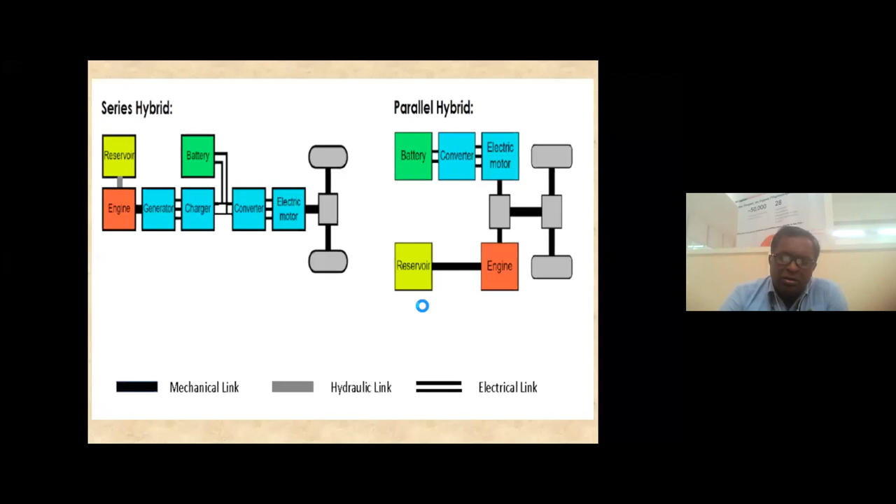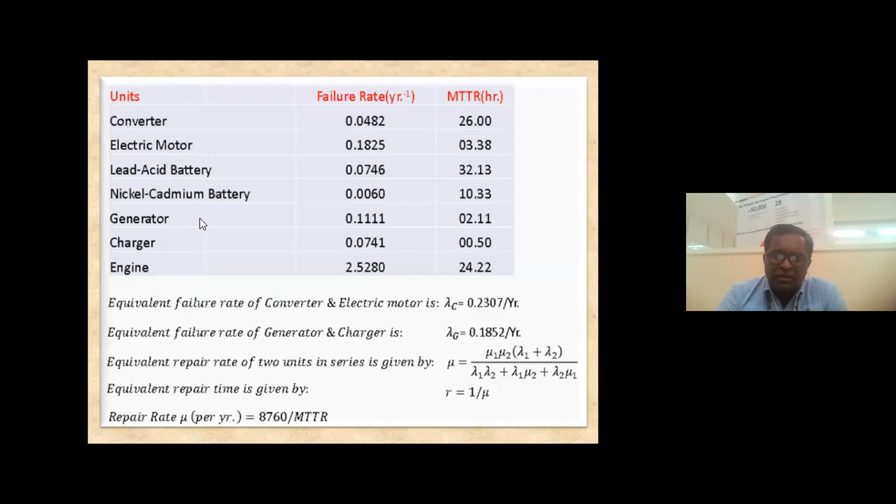How is it to be assessed? I'm going back, you see here. Here you can see how generator and charger, and engine and reservoir have been considered. Converter and electric motor are in series, combined as one unit. Similarly, generator and charger in series as one unit. Finally, four subsystems are considered, assuming all other mechanical elements are reliable.

So this is an assumption we made: all mechanical couplings and mechanical assemblies become highly reliable, they don't have any failure. But typically it is not possible. We assume this in this analysis.

So we have used lead acid battery for the present study. Though we have noted nickel cadmium battery failure rates, we have studied only lead acid battery because its mean time to repair is very large, whereas nickel cadmium mean time to repair is lesser. Based on that point, we have considered lead acid.

So when I considered converter and electric motor as a series, the failure rate is lambda C, MTTR is 8.10. Similarly for generator and charger, lead acid battery, and IC engines.

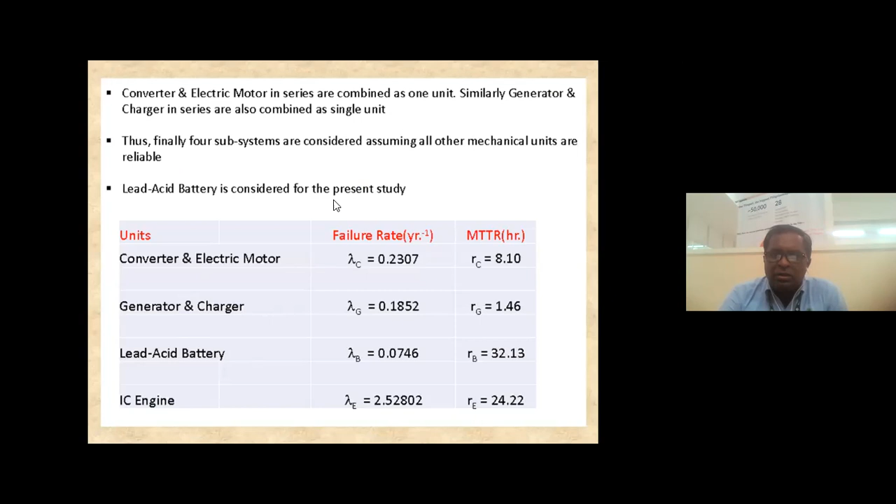So there are 4 components here, and 4 have to be modeled. When an electric vehicle moves, all these 4 have to function to drive, whether it is success or failure. So therefore, you can see 1, 2, 3, 4: C, G, L, I, or C, G, B, E, where B is battery, E is engine, C is converter, G is generator.

Here you can see if battery failed and engine failed, even with charger and generator functioning, it doesn't function. If the generator failed and engine failed, the battery cannot be charged, engine also failed, so the mission system has failed. So therefore states 1, 2, 3, 4, 7 are the successful operating states, whereas all other states are failure states.

So this is based on the Markov model, when components are connected in the series hybrid electric vehicle. Here you see that with 4 components, nearly 16 states appear. Out of 16 states, 5 states are successful, all other states are failed states.

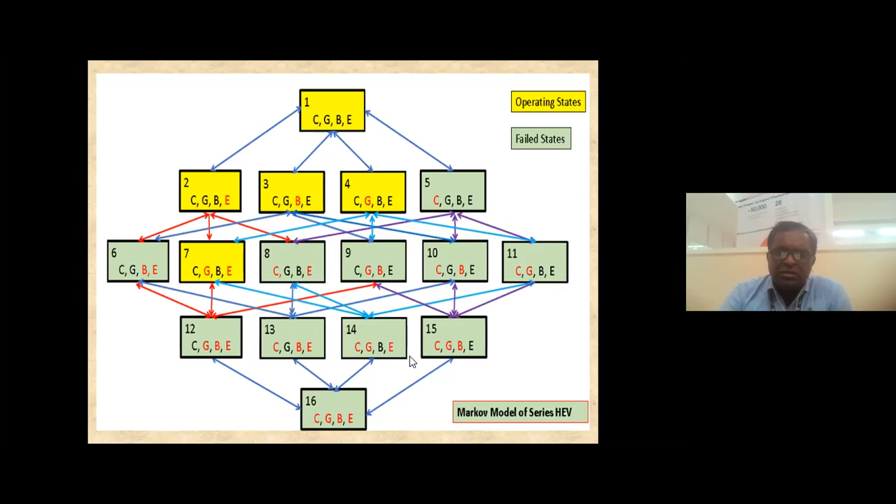Next, I am considering the parallel hybrid electric vehicle. Here I am considering converter and motor as one circuit, battery and IC engine as one circuit. So here again you can see 5 successful states. So one component has been reduced in the parallel hybrid electric vehicle. Operating states remain the same, whereas the number of failed states is lesser.

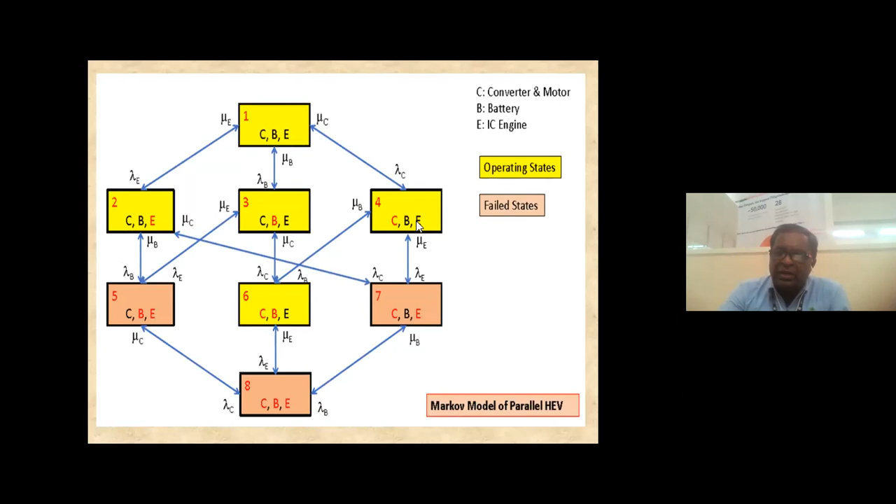As usual, you can see that once the engine is ready, it will function. Here, with all 3 ready, it will function. Here, converter and battery functioning, it will function. Converter and engine functioning works too. If converter fails and battery fails, but battery and engine succeed, we can still make it a success. So these form an 8 by 8 state transition matrix.

So you can see the stochastic transition probability matrix, with the help of which 5 states are success and 3 states are failed. You can see that availability is much higher, whereas mean time to failure is 1211.1 days. The operating mean time between failures, operating time is increased here. Operating time is increased, number of operating days is also increased. Stop time is reduced, considering 7 independent equations.

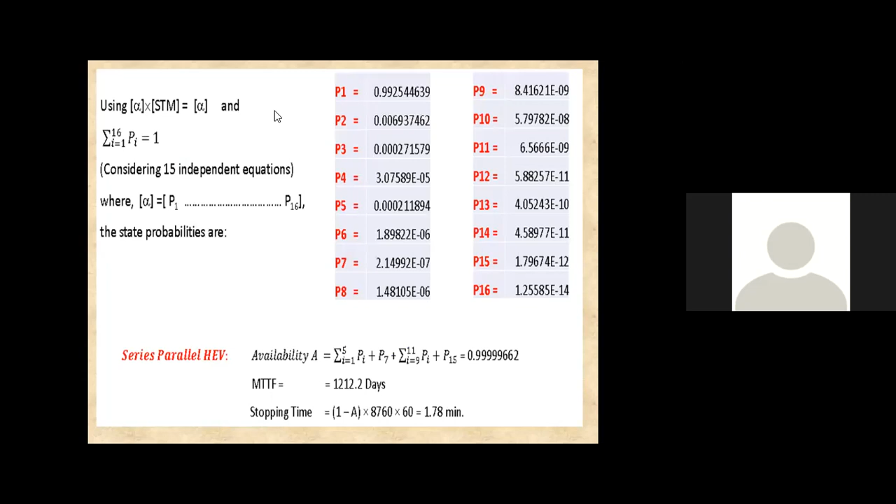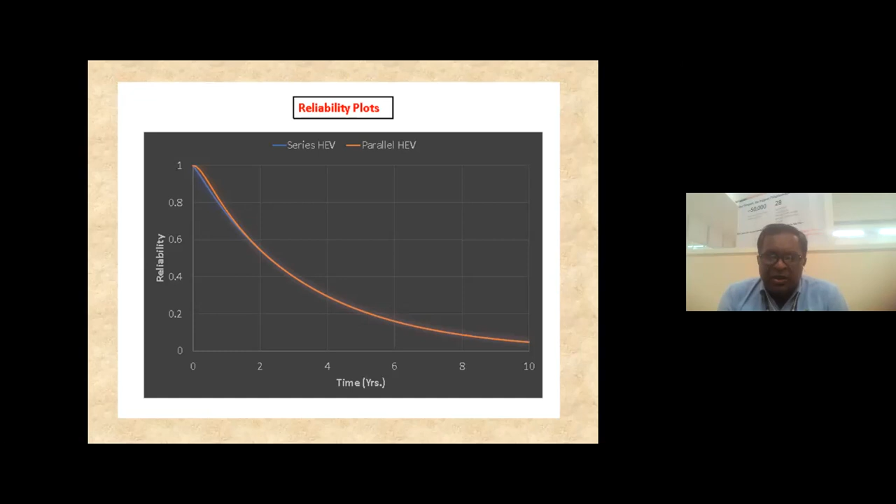So mean time to failure days has been increased. Availability compared to the parallel configuration is reduced. So therefore, overall, if we observe, series hybrid electric vehicle has got lesser reliability, whereas parallel hybrid electric vehicle has got more reliability and more success because of lesser failure rates, which we can assess very clearly.

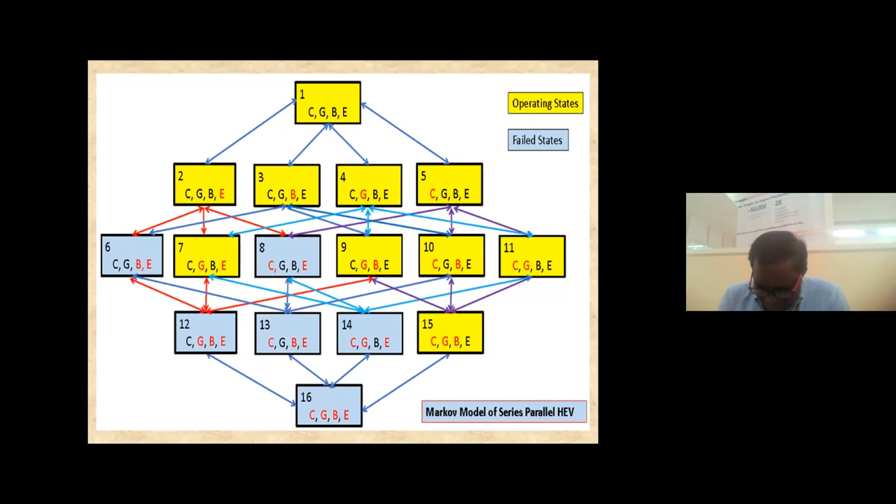One last question just came, sir — which vehicle is suitable for Indian conditions and driving attitude, whether it is series, parallel or hybrid? Series-parallel hybrid electric vehicle only, sir, because operating time is more. Operating time is more, mean time to failure is more.